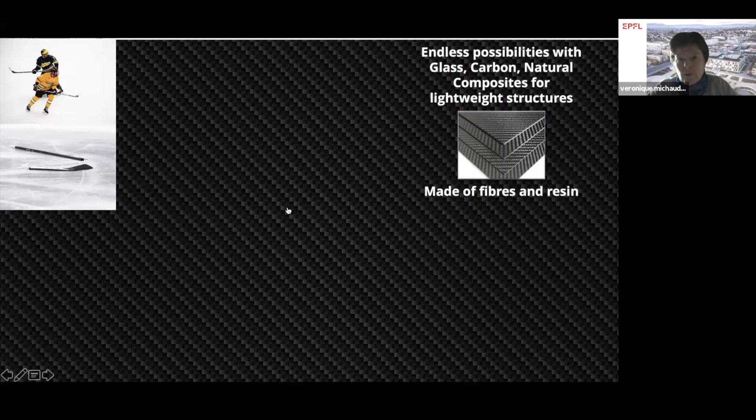To start, I'll show you a hockey player, something done a lot in Switzerland, and you see the poor hockey player broke his stick. This, of course, is made of composites. We have a lot of possibilities, as you are all aware, with composites for lightweight design, with fibers and resin. But it can lead to micro cracks, and these micro cracks, when they coalesce, can lead to failure of the part.

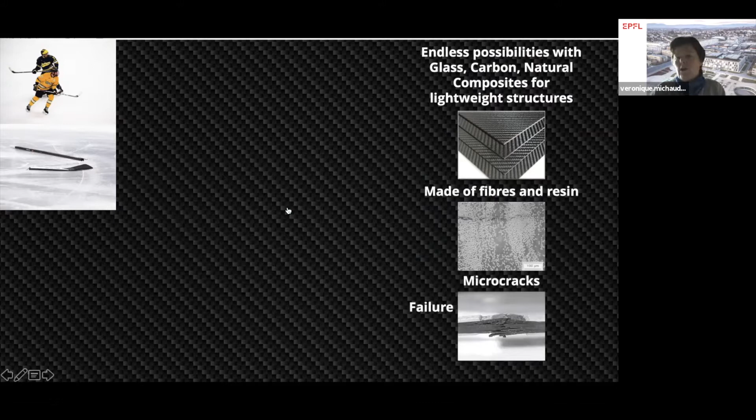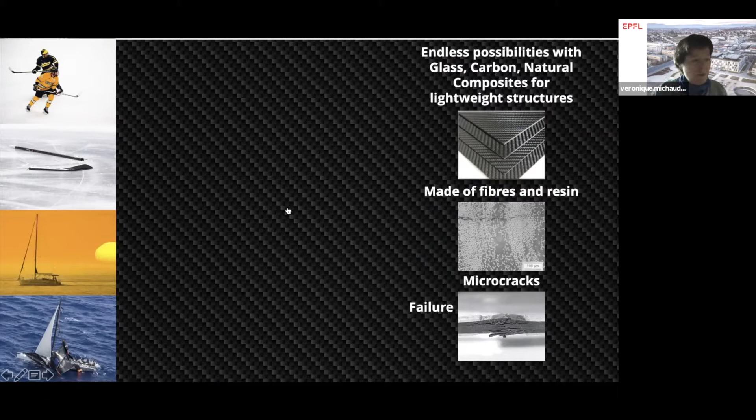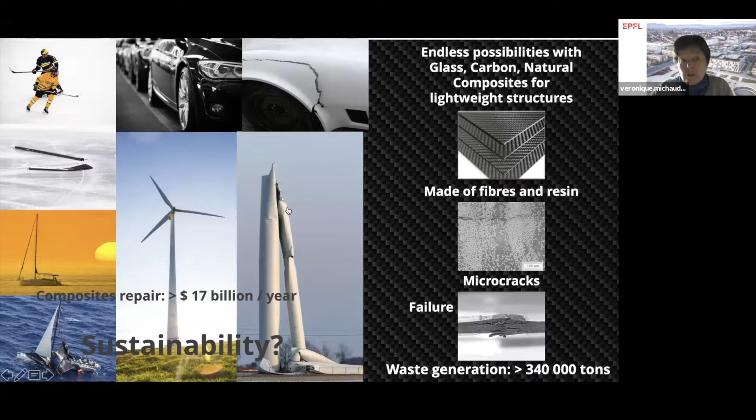This is not only true for hockey sticks, but also in many other applications, whether it's for boat building, for sailing, or for automotive or energy applications, all creating additional cost of composite repair and issues about sustainability.

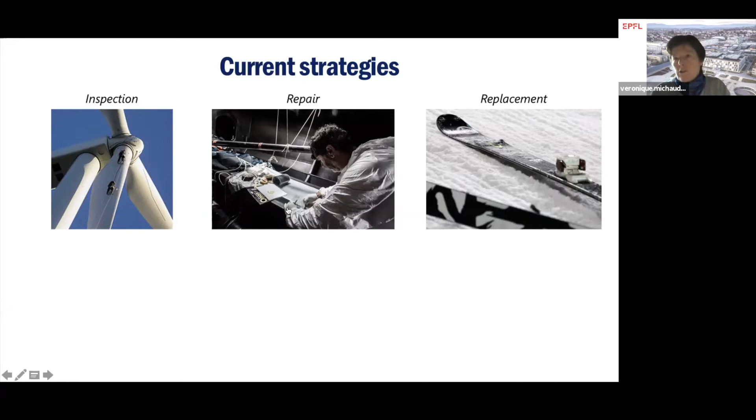So what are the current strategies when you have a composite failure that you would try to avoid? Of course, the strategy is to inspect and monitor, for example, for a windmill blade every so often by sending people there. Then when you see there has been damage using, for example, ultrasonic techniques, you can repair, which takes a lot of time, or you can actually throw away if it's a pair of skis and it's beyond repair. Of course, this all creates long downtimes, necessitates manual intervention, and is very costly, and needs very skilled labor.

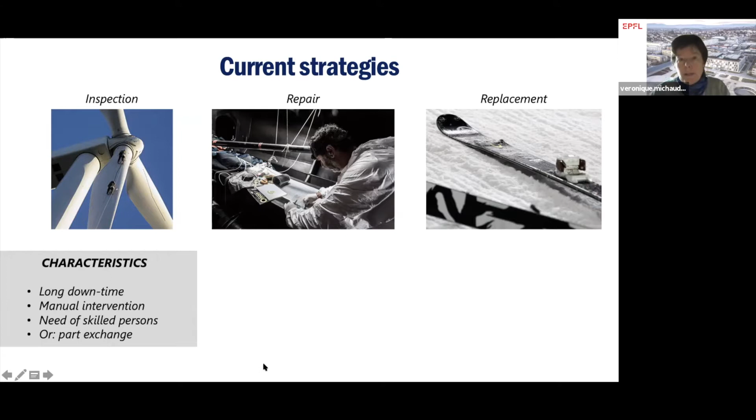What can be done is to evaluate the cost. For example, only in windmills, it was evaluated at $13 billion in 2020. So it's an important point. The needs of the market would be a repair process on site, which starts to be done in some cases, but at a limited cost, with no loss in properties, and with manufacturing that is compatible with what we have.

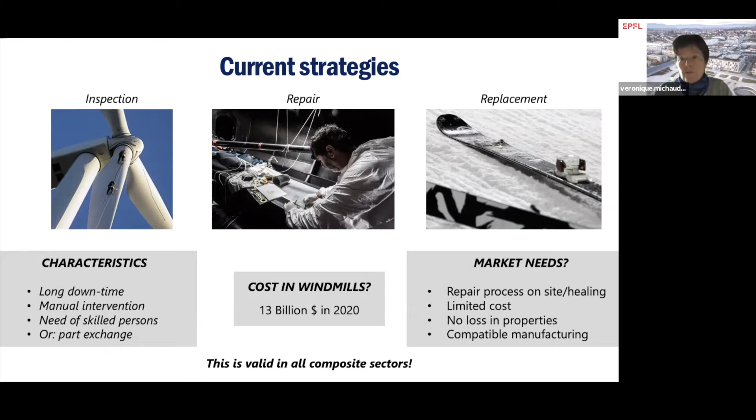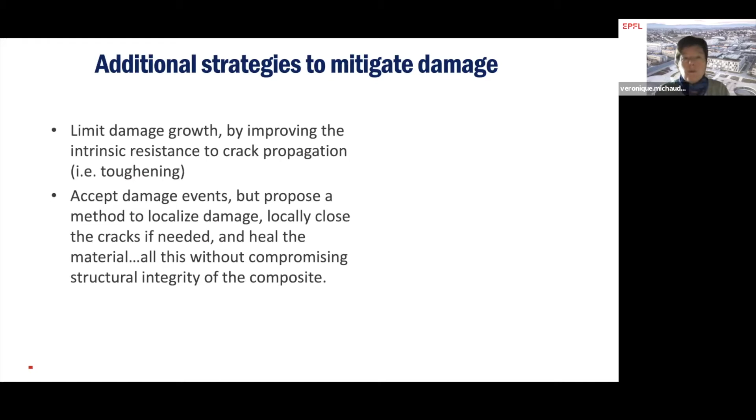Now, what are the additional strategies we can use to mitigate damage? Of course, there is a lot of research on limiting damage growth by improving the intrinsic resistance to crack propagation, for example, with toughening matrices, or different design variables that can be changed to improve the resistance of the structure. But another possibility is to accept that you will have damage events and propose a method that would ideally localize the damage, locally close cracks if needed, and heal the material, all without compromising the structural integrity of the composite.

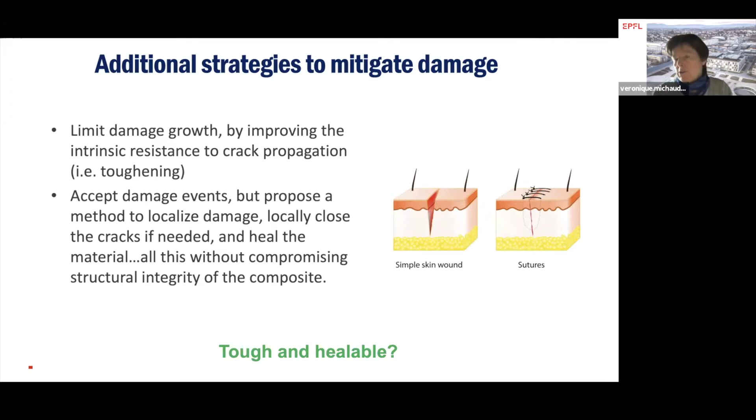So it's a little bit like a skin wound that you would have. By adding sutures, for example, you can help the crack close if it's too big, or if it's not big, it would simply heal by itself.

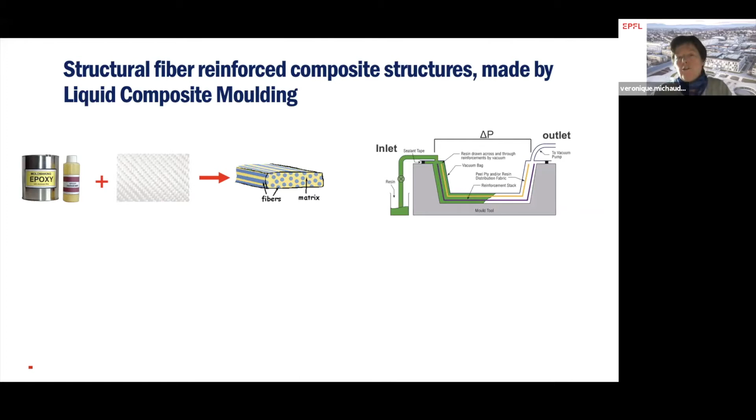Of course, we're not talking about skin here. We're talking about structural fiber reinforced composite structures, in particular those made by liquid composite molding, for example, which requires a resin that is typically a thermoset epoxy, could also be a thermoplastic, then fabric, and by infusion, for example, or RTM or other processes, you mix the fibers and the matrix to create the composite.

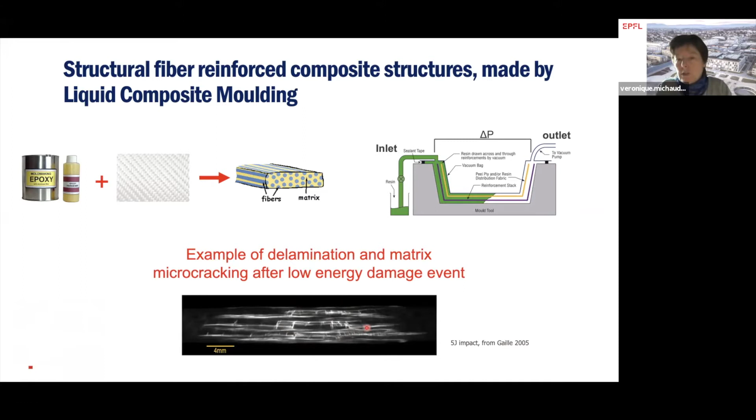As an example of delamination or matrix microcracking after a low energy impact event, you see here in this figure an X-ray picture after a 5 joule impact of a composite, showing a lot of microcracks present inside the composite. They may not be so severe, but if you do not do anything about these, the integrity of the structure might be damaged.

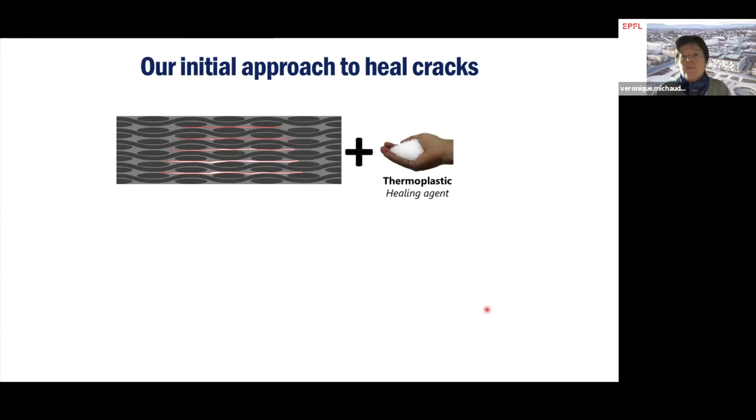So our initial approach to heal cracks was to propose a composite that would be load-bearing with a high volume fraction of fibers, but add a healing agent inside the composite so that if there is a crack, with a matrix that has fiber reinforcement bundles but also this matrix made of little phase-separated thermoset and thermoplastic mixture, the crack takes place after moderate thermal trigger, and you will fill the crack with the thermoplastic phase that will flow into the crack and heal it through this phase.

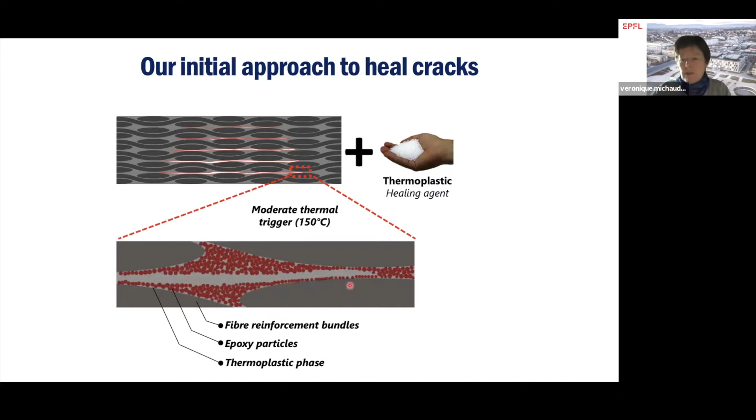Of course, this requires heat. We did a lot of work previously on healing without heat, but then the material is normally too soft at room temperature, so it becomes very difficult to work with this material. So our choice was to go for this assisted healing using thermal trigger.

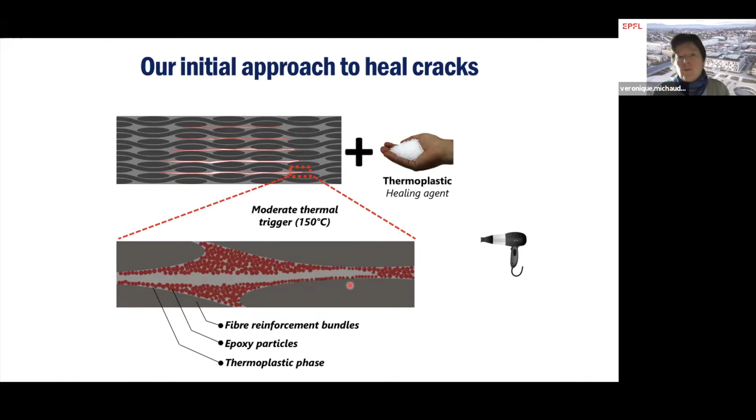There are model systems that exist in the literature, and we got inspired from a paper published about 10 years ago by Luo et al.

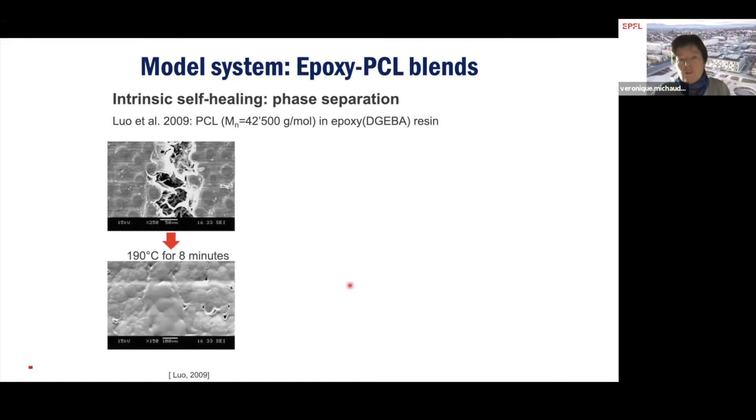On intrinsic self-healing with phase-separated matrices using PCL in an epoxy, a traditional DGEBA resin. He showed that by heating at 190 degrees for 8 minutes, you got complete healing, and that it depended a lot on the microstructure, which itself is a function of the volume fraction, or mass fraction, of PCL in the blend.

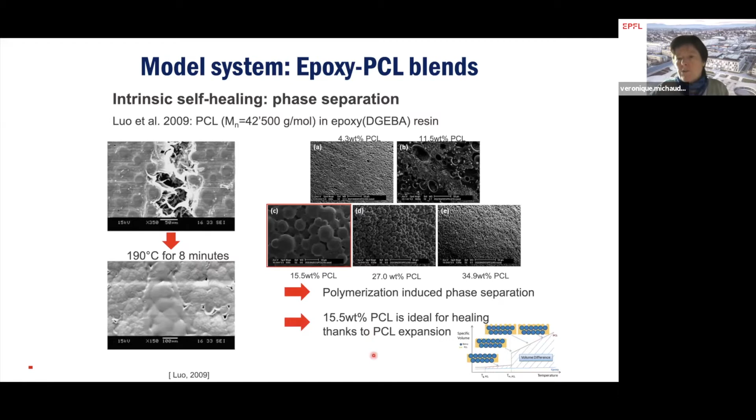Depending on the mass fraction of PCL, you get polymerization-induced phase separation with different morphology. He showed that around 15 weight percent PCL was good for healing, thanks to the PCL expansion. Because of this heat expansion of the PCL after melting, you get the possibility of the PCL to bleed.

This brick and mortar morphology, as he called it, was the best one to obtain this bleeding and healing of the PCL phase. So we started exploring these blends and worked on model systems with epoxy and PCL, mixing and curing for 3 hours at 180 degrees. Then we got phase separation.

In our case, we found that about 25% PCL was the right amount that we needed. We see that the storage modulus at 25 degrees and 150 degrees, which is the healing temperature we use, decays with the presence of PCL in the matrix. However, it remains above about 1 gigapascal, which is acceptable.

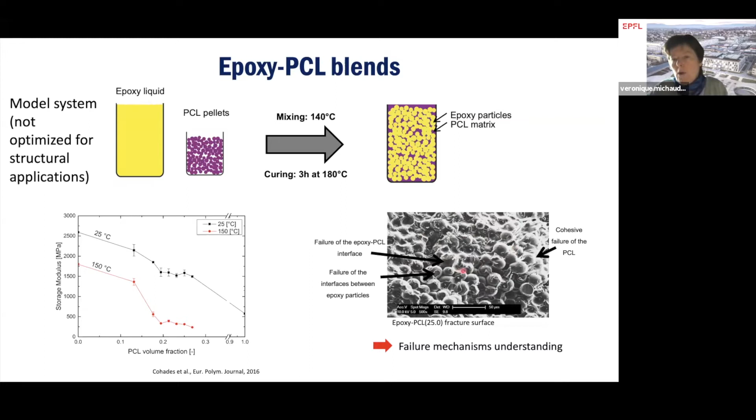We also see this microstructure that was proposed and observed already by Luo, and in the fracture surface we have all kinds of mechanisms taking place depending very much on the morphology of the blend. We saw that if you increase the volume fraction of PCL, you get very good toughness properties for low volume fractions, but as you add more PCL, you lose a bit in toughness.

But as you add PCL, you increase a lot in terms of healing efficiency, which was a toughness recovery in TDCB configuration in our case. So there is a region where you get decent healing without losing too much in terms of material toughness.

We found that it works, and you get a good healing efficiency after several healing cycles. Depending on the blend, you check that it's really a phase-separated blend, where the PCL is still obvious in the DSC traces, as well as the epoxy glass transition.

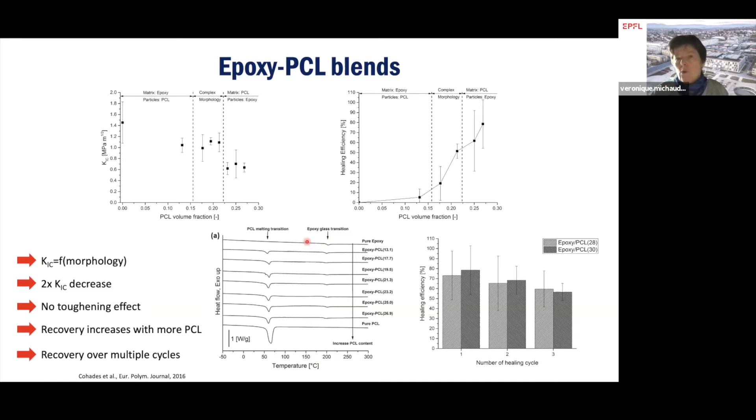Note that the epoxy glass transition is high enough so that, thanks to this connected epoxy morphology, when you heat the material up to 150 degrees, you don't lose all mechanical strength because you still have this network of epoxy to keep it. So then we considered if we could use it as a matrix.

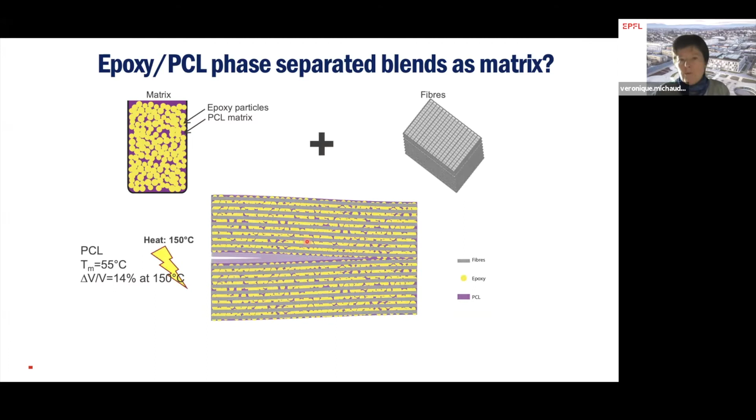So we put it into a composite with fibers. The idea being that if you have a crack, then upon small heating at 150 degrees for half an hour, for example, you get the PCL bleeding, and that will end up closing the crack. We saw that it actually works.

We looked at the morphology, and the presence of fibers affects the phase separation a bit, with big resin pockets having the normal phase-separated morphology, and smaller resin pockets having a different morphology, yet we still see that it works. We also checked that there was no loss in modulus compared to pure epoxy reference composites, and that we had a stiffness recovery over several damage and heal cycles.

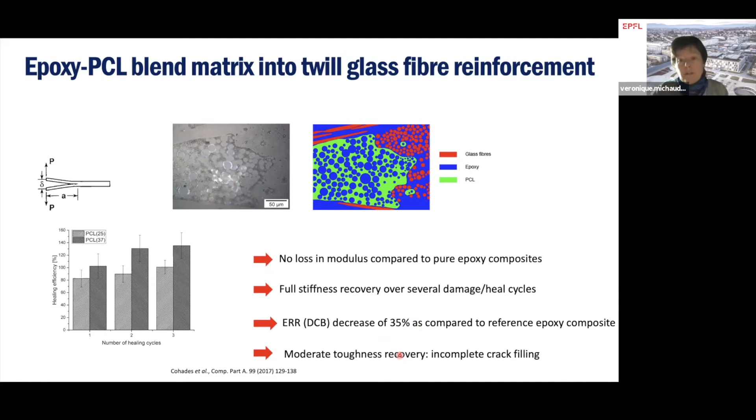The energy release rate, however, decreased quite a lot compared to the reference epoxy composite due to the loss of toughness of the matrix. And we had a moderate toughness recovery due to incomplete crack fill.

So we had something that worked, but normally you don't have a DCB test happening in real life. So damage could be, for example, under the form of an impact, creating some micro cracks. We looked to see if we could really heal the micro cracks. So we did this experiment of an impact.

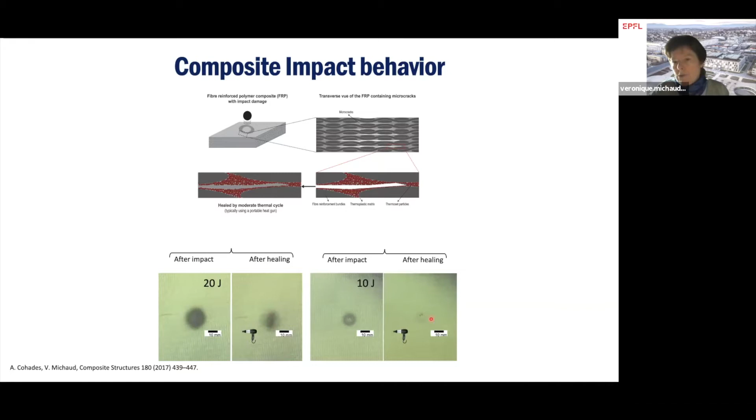We expected the healing to take place, and we checked visually with glass epoxy PCL composites that after healing, the damage from the impact started to disappear, and if the energy of impact was not too high, after moderate healing we could see that it disappears completely.

We checked this with C-scans to see that we have this effect depending on the energy. With a low enough energy, 8.5 joules is already quite decent for a composite. Remember the picture I showed with 5 joules before, leading to a lot of micro cracks. With this, after healing, we got almost all the surface filled up.

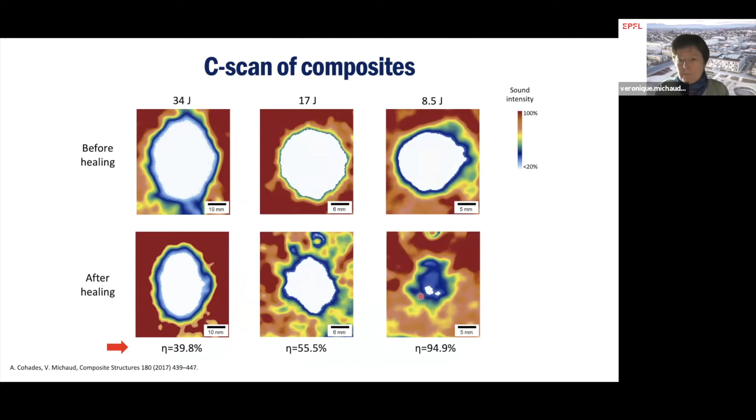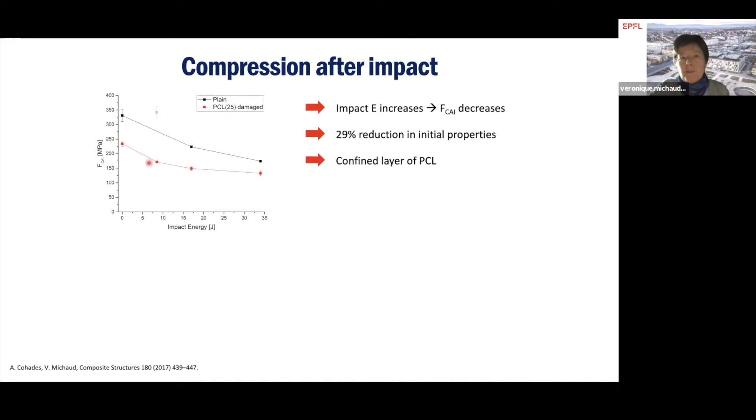So it was encouraging. Of course, this is not yet perfect, but we could see that it works. And that, of course, the healing efficiency decreases a lot with impact energy because we cannot recover fibers that are broken, but we can recover microcracks fairly well. So healing was also possible over multiple cycles, and at high energy, as mentioned, it didn't work.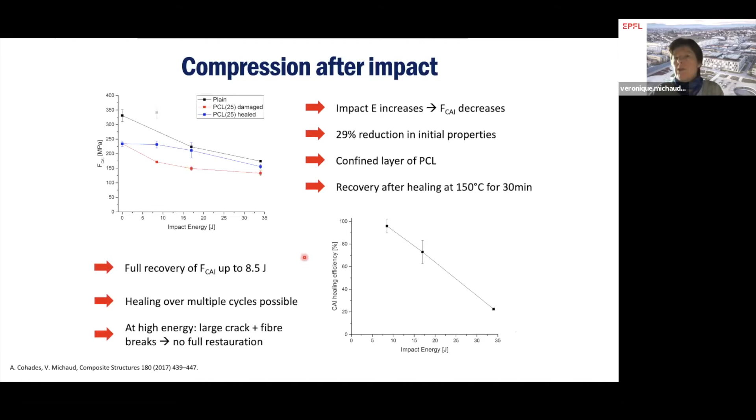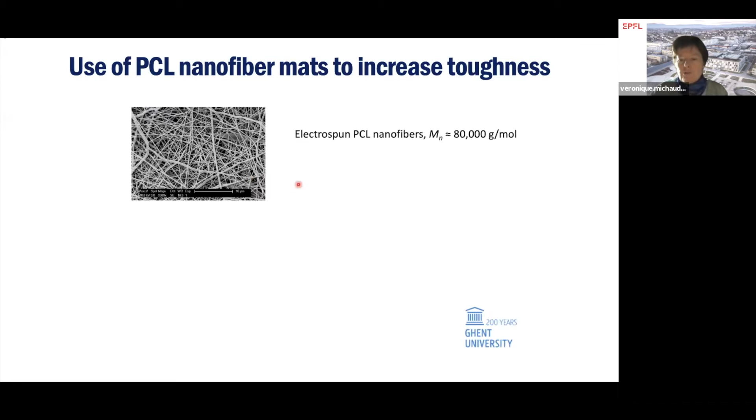So to increase the toughness, because this is really the Achilles heel of that PCL material, we considered the use of nanofiber mats. This was a collaboration we had with colleagues from Ghent University, where they make electrospun PCL nanofibers, which we integrated into the composite with one PCL nanofiber between glass fiber fabrics. Then we impregnated with an epoxy resin, we cured, and we looked at the properties.

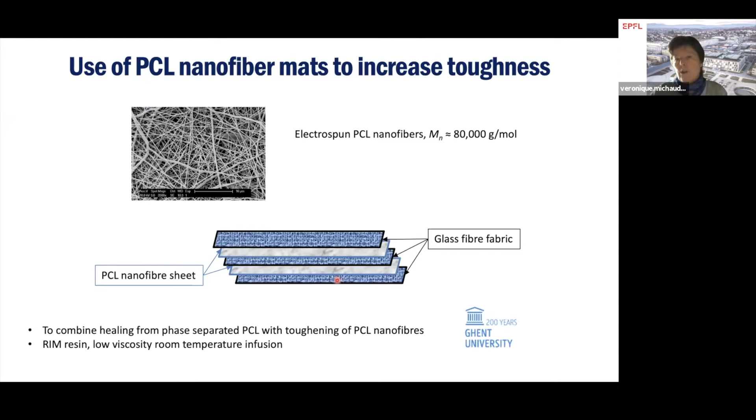We used different ways of curing the material, and then we did some DCB testing to look at the toughness of the material. We had a plate that was an epoxy plate that was our reference material with the G1C around 1 kilojoule, a bit over a kilojoule per meter square. Then we did a plate which was cured at room temperature only, one that was cured at 60 degrees, so above the melting point of the PCL, and one that was cured at 80 degrees, so way above the melting point of PCL.

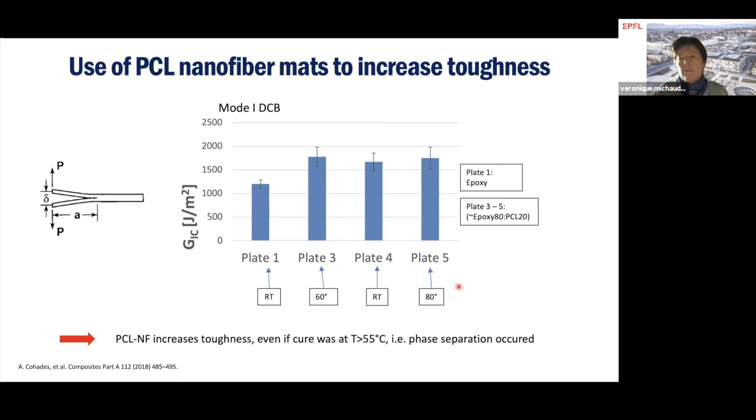What was interesting is that in all three cases, the toughness of the material was quite improved, whether we actually preserved the nanofiber mat structure below—so it was not molten and it remained—or actually even a bit better above the nanofiber mat melting. So we had melting and phase separation, which we could actually see in this SEM picture.

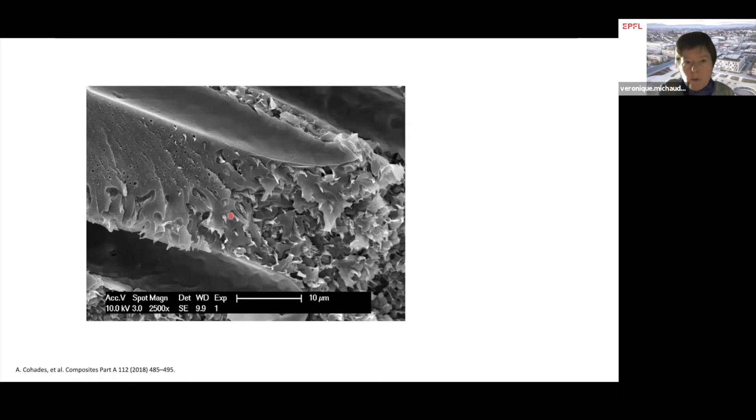You see that this is the matrix. You see a lot of different things happening. But if we look a bit more carefully, in some regions you see that you have an epoxy-rich region with a bit of PCL particles. In other regions, you have a phase separated domain. And then in the final region, you have epoxy particles clearly visible in the matrix, showing that we have this phase separated morphology we were looking after.

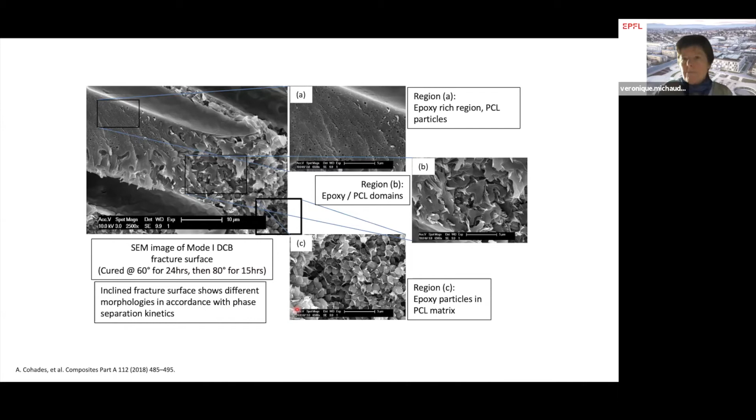So we get a good toughness improvement. Do we get healing? Well, we did the same experiments as before. We closed the crack, let it for 30 minutes at 150 degrees, and unfortunately no healing was observed at all. And we understood why, and published this actually.

It's attributed to the shrinkage of the stretched polymer, and most importantly, the PCL that we use at a high molecular weight in this case, with a very high viscosity, a very thin microstructure. So it was very difficult for it to flow within the narrow channels.

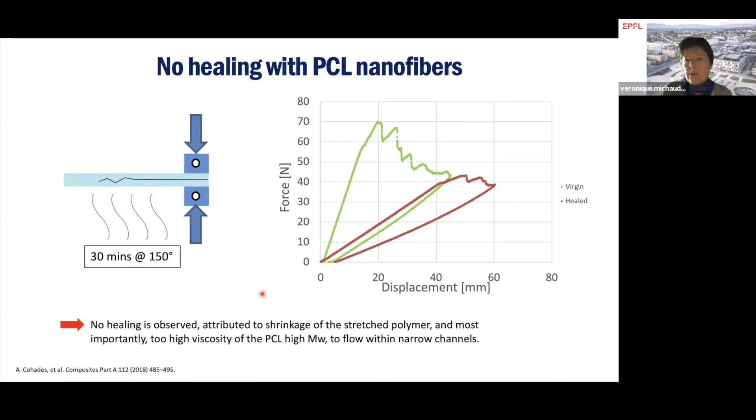With epoxy PCL microparticles, we tried—we also got a good, decent toughness, but no healing. With the blends, we had a decent healing, but no toughness. And we also tried with films interleaved between the epoxy, full PCL films. We got, of course, very good healing, but we had no fracture toughness at all due to the presence of those PCL films.

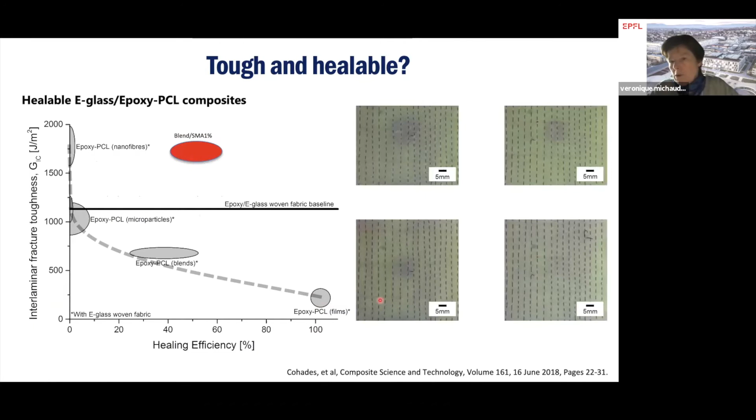So to get to a place where we get decent healing and decent toughness, we tried different things. One was to blend, use the same blend or similar blends, but with shape memory alloy wires, and only with 1% of these shape memory alloy wires that are stitched inside on the fabric and then impregnated as usual, we got decent results.

We can show it here. This is a picture where you see the fibers being broken after we really opened the crack.

But if we do DCB with a forced displacement, we see that in the zone where there was no SMA wires, we get a normal behavior, the normal behavior that we had. But then at this zone where we started to have the SMA wires stitched, we had a big threefold increase in the fracture toughness due to the presence of the stitched SMA wires.

This has been well known, actually. Adding stitching increases it a lot, and we elucidated the various mechanisms that take place.

However, we see also that after damage, we have the crack that is open, but after healing, the fact that we heat up will help also the shape memory alloy wires to shrink and close the crack. So this really improves the crack closure and the healing.

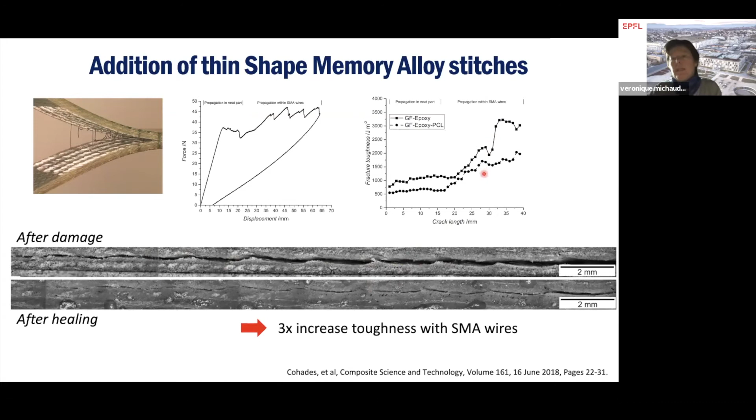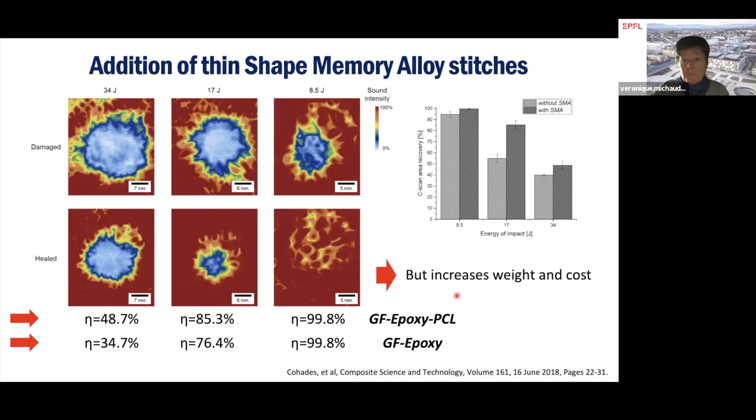So what to do next? Next, we worked a lot. This was after my colleague Amael Cohades had just finished his PhD. And we thought of an improved matrix system, which is now in blue here somewhere. I cannot really tell you what we put in there because we filed a patent a few years ago, which is still pending. But we managed to improve the fracture toughness, yet preserve a good healing efficiency.

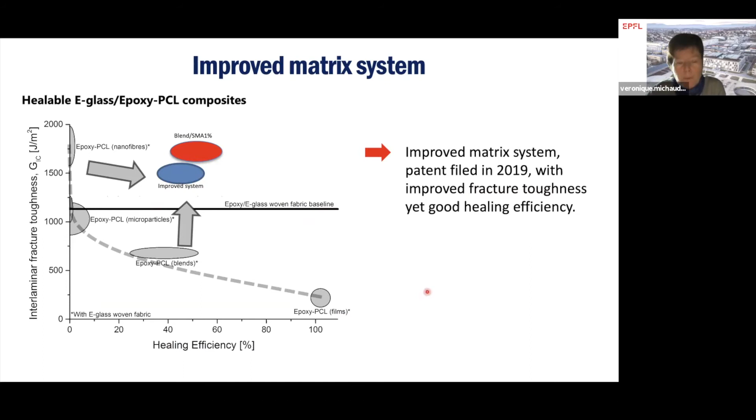So we went on with the system. We saw that it still retains a very good impact on healing. This is a reference epoxy as usual, and then the reference healed. We see a bit of resin relaxation, but the damage is still present. And in the healable composite, we have a full healing of damage.

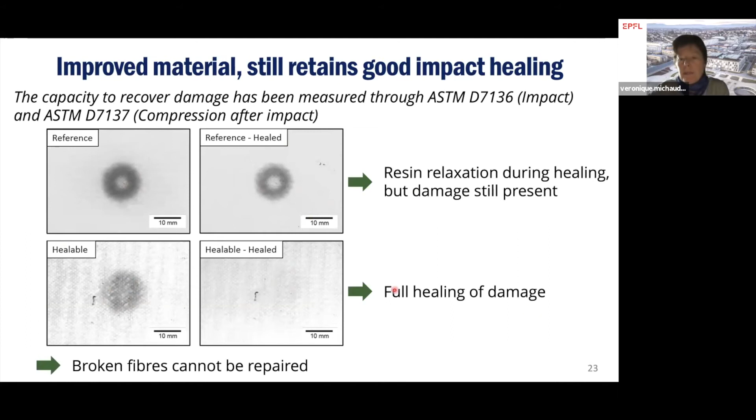And then again, we checked it with compression after impact. We saw that the healing efficiency of the healable system was very good again at low energy, quite good at moderate impact energy, and quite decent at high impact energy. We see also that we have increased the resistance and the healability of our material compared to our initial blends, because we increased also the toughness, which makes the material less sensitive to damage after impact initially.

So this was very interesting. And then if you have the pure resin only, after heating at 150 degrees, the reference system, we see that we have a bit of healing due to resin relaxation, but it is not very reproducible, with a very large variation in the properties.

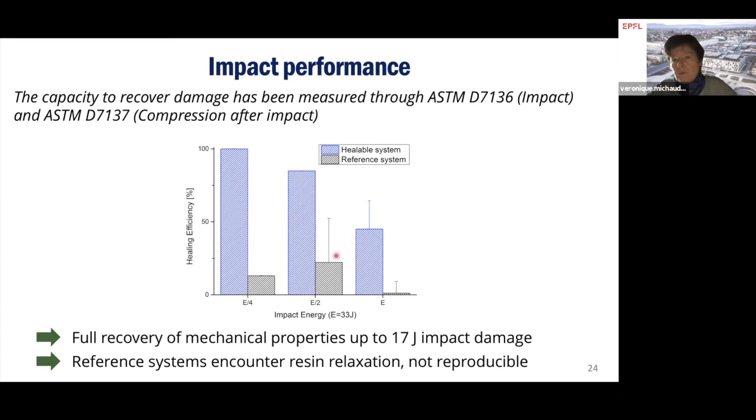Another thing that we looked at was the aging performance of this new matrix material. As compared to the reference system, by putting it at 80 degrees in high relative humidity for several days, we saw that there is a water absorption that is a bit higher than what we would have for reference epoxy, and a bit of decay in short beam strength after this exposure, but actually not so bad compared to the epoxy system, so it was still acceptable.

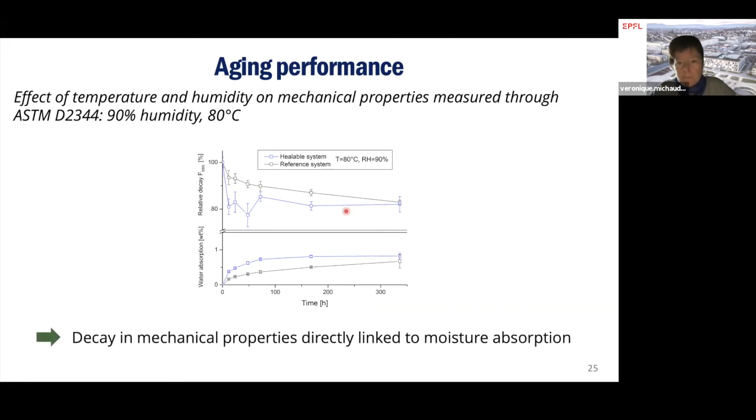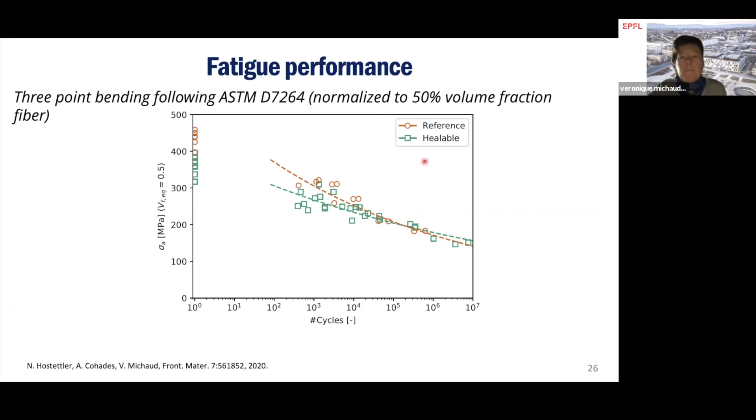Now, what is interesting is what's happening if we do a healing treatment. For this, we had to find when to do the healing treatment, and we developed a model for the probability of survival, which helped us to find the probability of survival as a function of number of cycles for the healable and the reference composite.

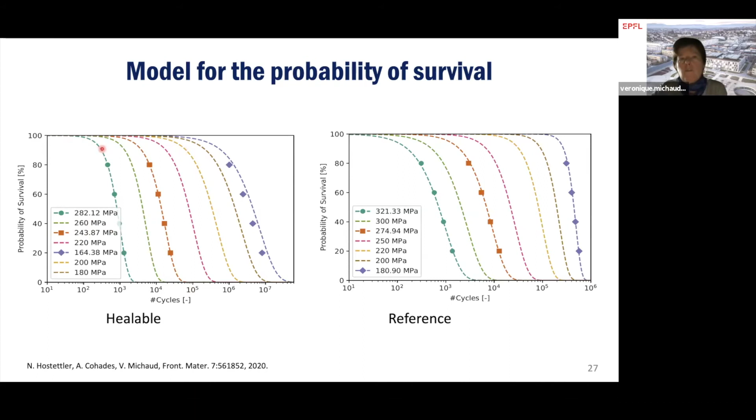We see, for example, if I put myself here at 243 megapascal, and I have, for example, at this number of cycles, about a 40% chance of survival. And then as I increase the number of cycles, the chance of survival decreases. So we decided to put ourselves at 90% chance of survival when we do the healing. This means that we take the material, we do the number of cycles that we need, then we stop, and we put it in the oven for half an hour at 150 degrees, and then we test again.

So what we found in that case is that if we look at the bottom, which is the reference material, we cycle it up to 90% survival. Then we put it in the oven, we put it back, we cycle again, and it started to fail after twice the number of cycles that we had done.

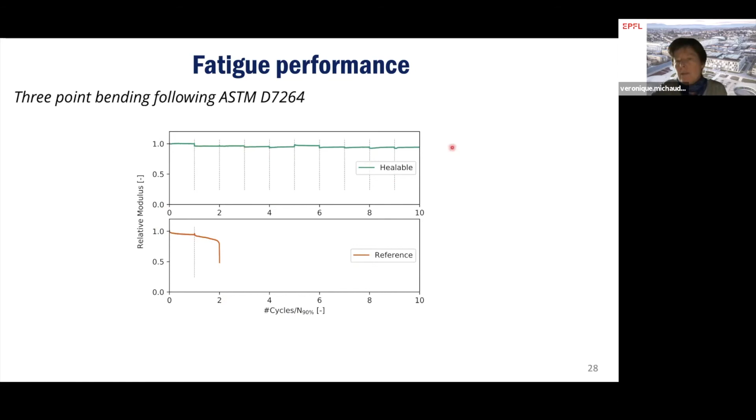With the healable material, we put it in, we start at 90% survival rate, we put it in the oven, we put it back, and then it went on, put it in the oven and back up to 10 times without ever breaking the material. So our conclusion was that, of course, we can extend the fatigue life indefinitely, which is maybe to be checked, but at least it's a very promising result.

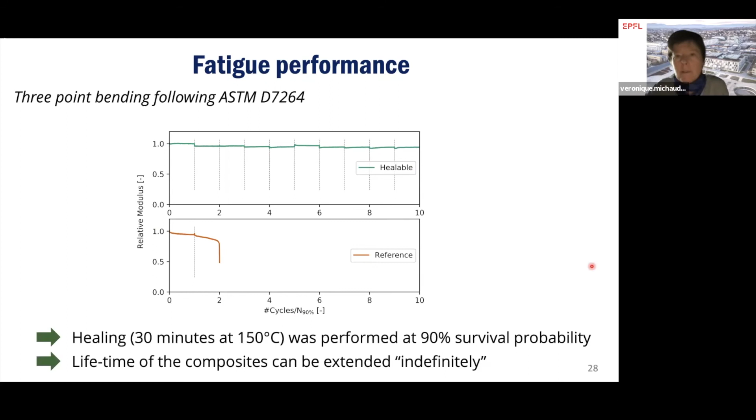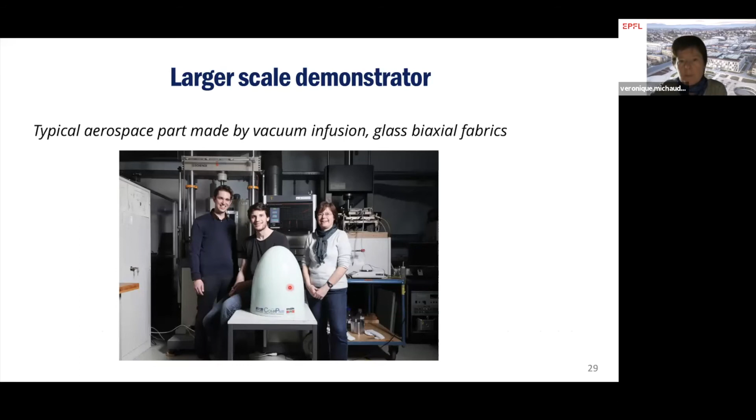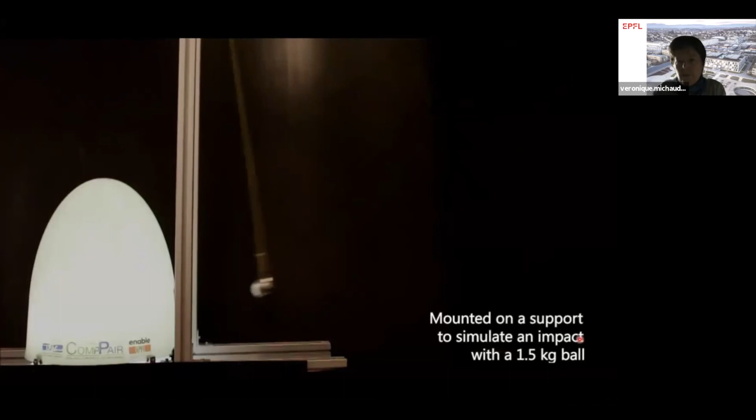So we went on to do larger scale demonstrators. We made a typical aerospace part with the glass biaxial fabrics. We were very happy to be in front of this, beautiful. And then you see that the video here is mounted on a support. We have a 1.5 kilogram ball that is impacting, and we have the impact that we can see here.

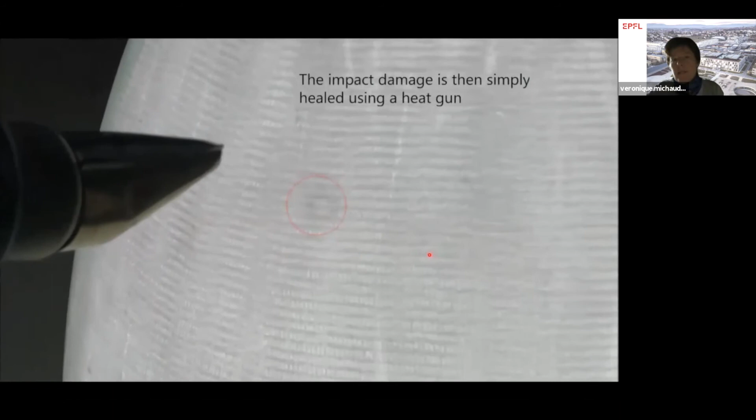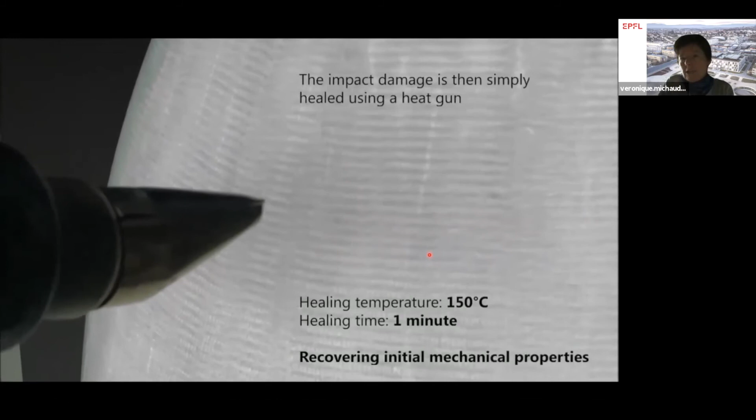We use a simple heat gun for 1 minute in this case, and the impact actually disappears under your eyes. So it's actually quite impressive. Looks like magic almost. And we check, of course, that we recover the initial mechanical properties, and also there is no real change, for example, in the quality of the surface of the part and so on.

So with this, we went on to create a company after we had filed this patent and so on, which is called CompPair, making semi-products for composite manufacturers, which are pre-pregs in this case. So we moved from infusion to pre-pregs with a 400 times faster repair than, of course, having to send a guy, having to cut and do all the repair that would normally be done. Good regeneration, we can do a lot of healing cycles, and we have also an increased crack resistance compared to a decent usual resin that people would use.

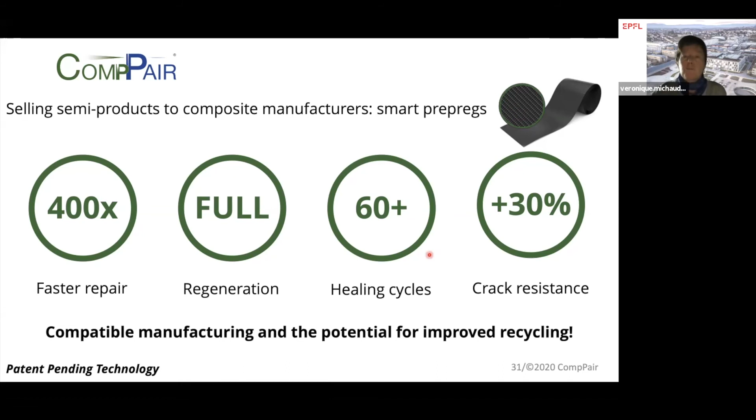We also, I forgot to mention this, have a potential for improved recycling, and we currently have a project running on finding a recycling route where we can actually recuperate the fibers much better than with a traditional epoxy, and that is also a benefit of this material.

Now this has got the label from Solar Impulse Efficient Solution. We have different materials from glass and carbon, different types of fibers. And ideally, what we plan to do is really to have a circular vision, providing full circularity to the composites industry.

So if you take a composite and you have damage only to the matrix through microcracks, you can actually heal it, and then you can continue to use and rotate the material by regular maintenance, and the maintenance being only to heat up at 150 degrees for a few minutes, which could be even done locally by a drone, for example, if you consider a windmill.

Then, if you have a damage to the fibers, of course, we cannot heal this damage. And then, in that case, you need to go to the recycling route, and then maybe production and reuse, or to a normal repair route, which is also possible if the damage to the fibers is only very localized and very minimal. So this really goes in the way of hopefully improving the vision that we have of the composite industry by proposing alternative routes to simply discarding, landfilling, or having to repair even small impacts.

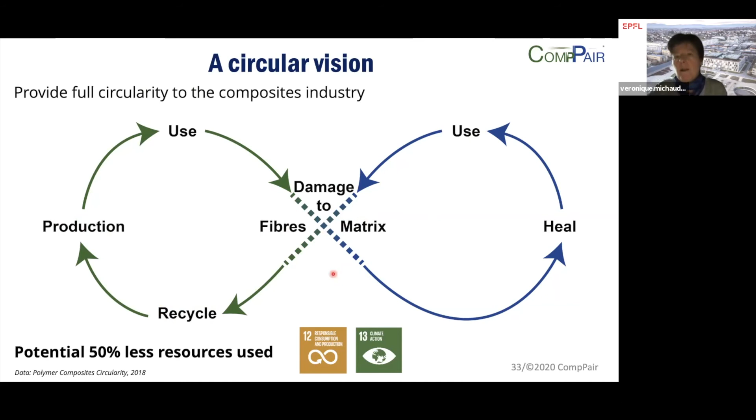With this, I conclude saying that composite matrices I've been showing you based on thermoset-thermoplastic blends have a good potential for heat-assisted repair. We showed that the integration of shape memory alloy stitches increases the composite toughness and the ability to close cracks and the ability to repair it, but then we add, of course, weight and cost, which might not be very practical.